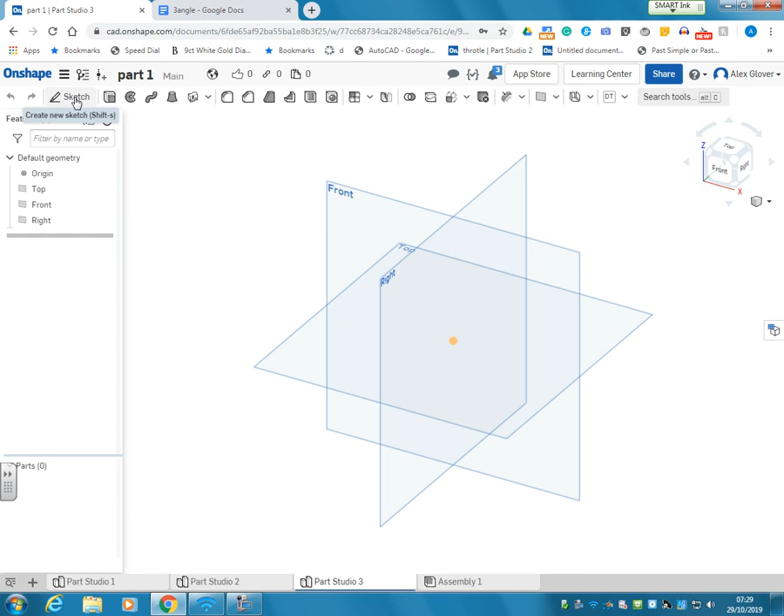Okay, so welcome back to part number 3. So on this part we've got quite a number of features to draw, and there's no constant cross section through the whole thing, so we're going to have to just do different sections at a time. So first of all, I'm going to draw on the front plane, and I'm going to put my back plane on there.

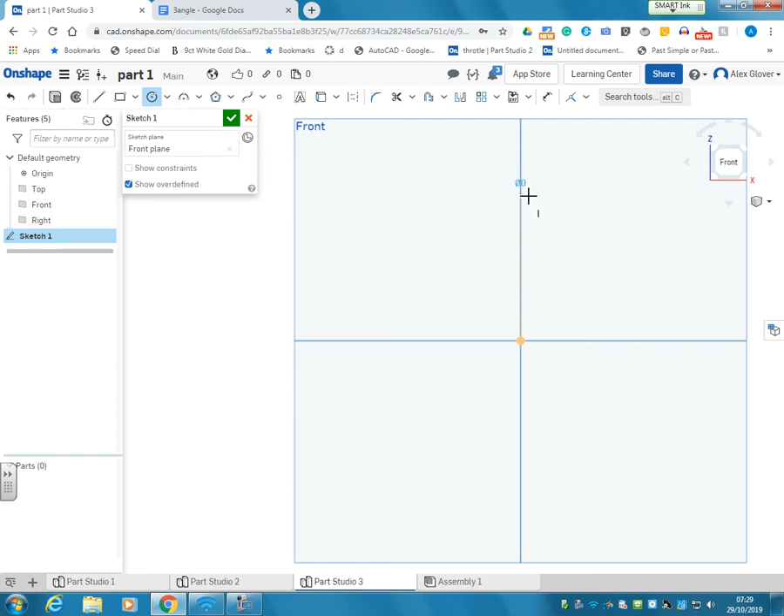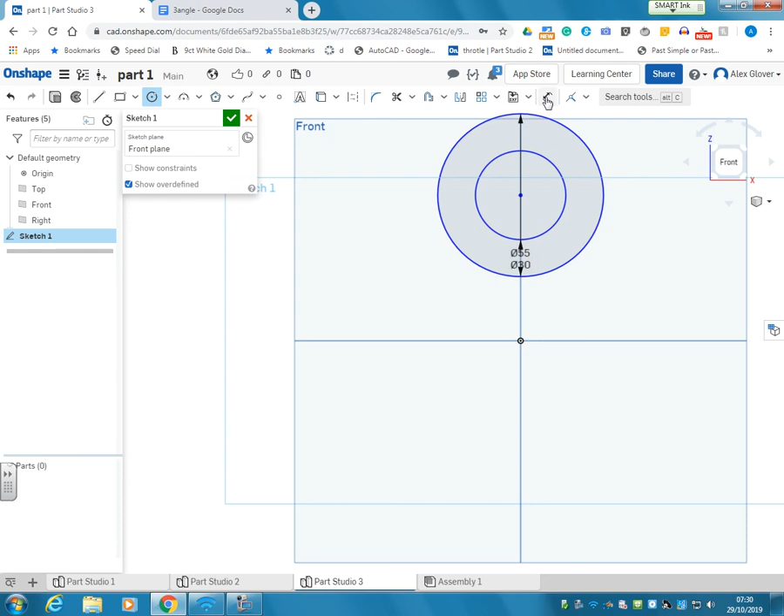So if we look at the drawing, we're going to use the circle. The biggest circle is the datum, and this circle is 55 diameter, and then there's another circle in 30, and we know dimension wise it is 100 mil from the bottom. We don't need much more detail than that because it's on this datum plane.

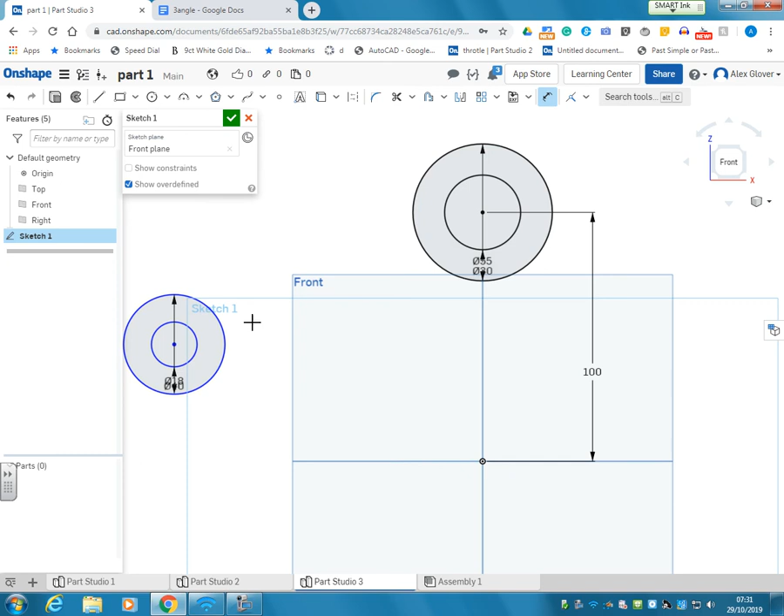So what do we need now? We need the other circle, which is out here somewhere. So the outer has a diameter of 40, and the inner circle has a diameter of 18. And we know that it, dimension wise, from the other circle here is 70,

and now we need to draw the line underneath. Straight down and then across to an unknown distance. We'll put that in a minute. Get rid of that line because we don't need it. These circles are still blue. This is because their height's unknown. We'll put that in now. It's 38.

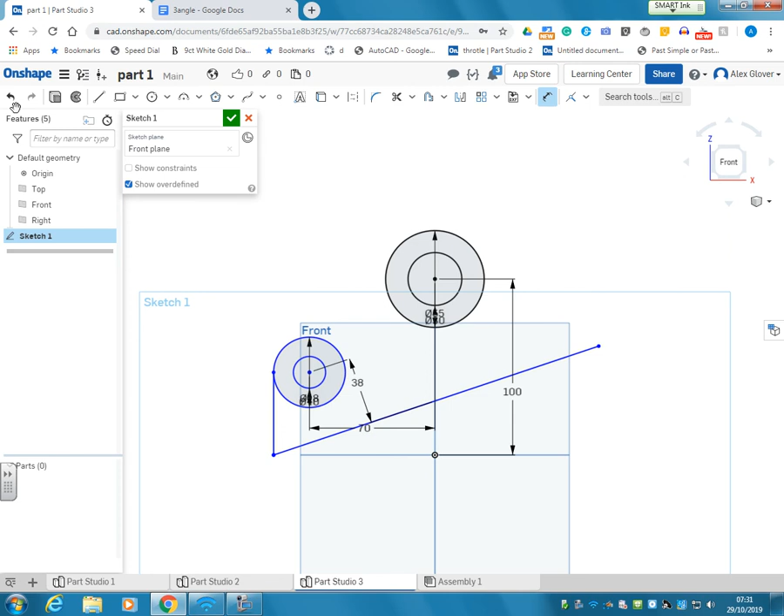Okay, it's took the line. So just go back a few steps. It'll make life easier to get that dimension in. So from there to that plane, 38, and now I can draw my line in. I think the line goes up to touch that.

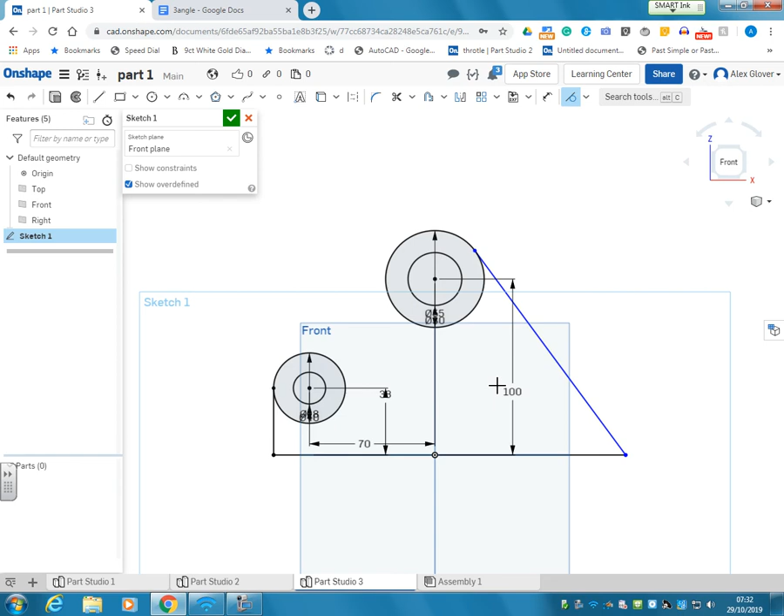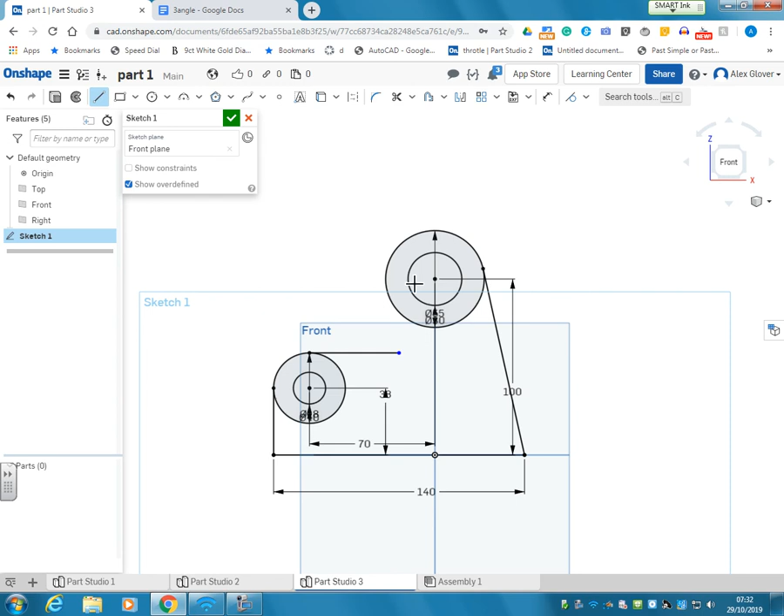Now it's at a tangent, so we can use tangent tool, click both of those, push the tangent, and we know the length of that line underneath is 140, and then we've also got, go from here across, and then from here down, then we'll put a radius in there. And I think it says the radius is 25.

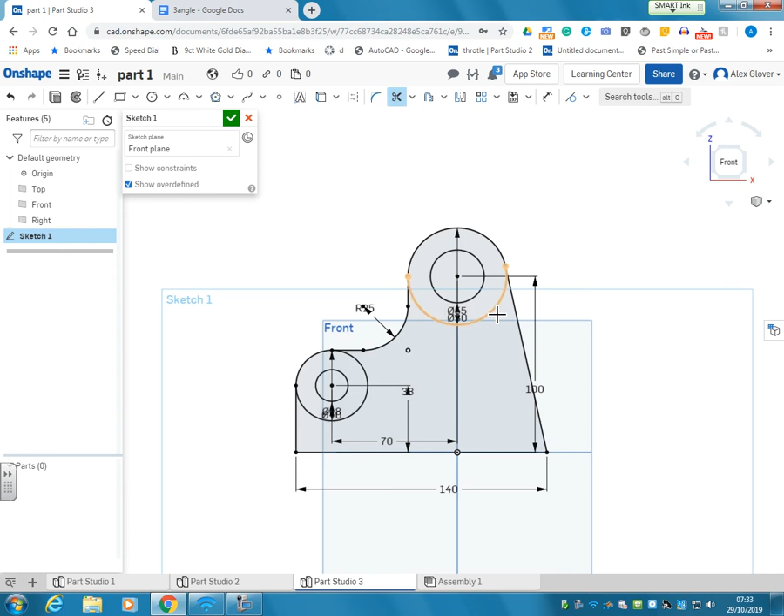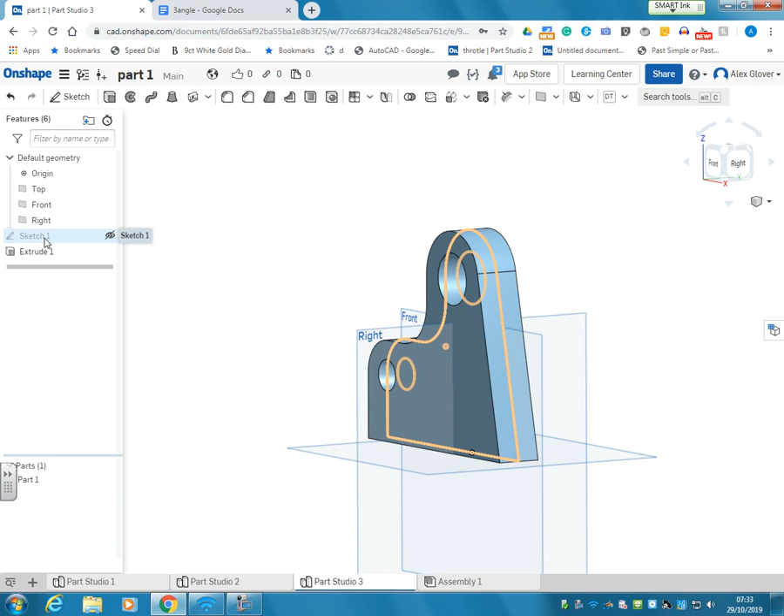Okay, and then we need to trim away what we don't need, which are these bits. And from that we can make the plate at the back. Now we're not going to make it blind, we're going to make it symmetrical, because there are some features on there, especially this circle at the top bit, which is symmetrical, and this bit isn't, but it doesn't really matter too much. We can pull it out from this surface. So that's okay, apart from the thickness, which was 12, not 25.

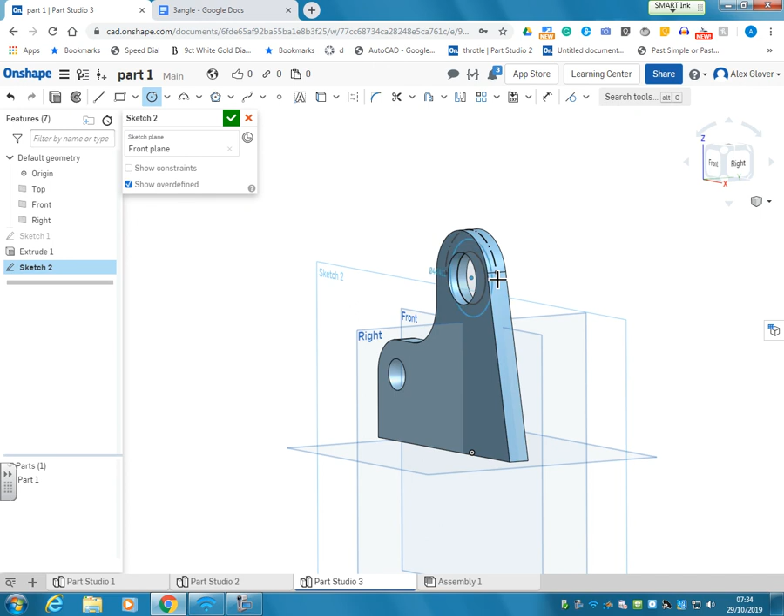So now, sketching on the front plane again, we can use and then get a circle and go out to there. So we've maintained design intent there, because whenever anything from the first sketch changes, these are all linked to it. We can extrude part 2 symmetrically, and the width of that is 36.

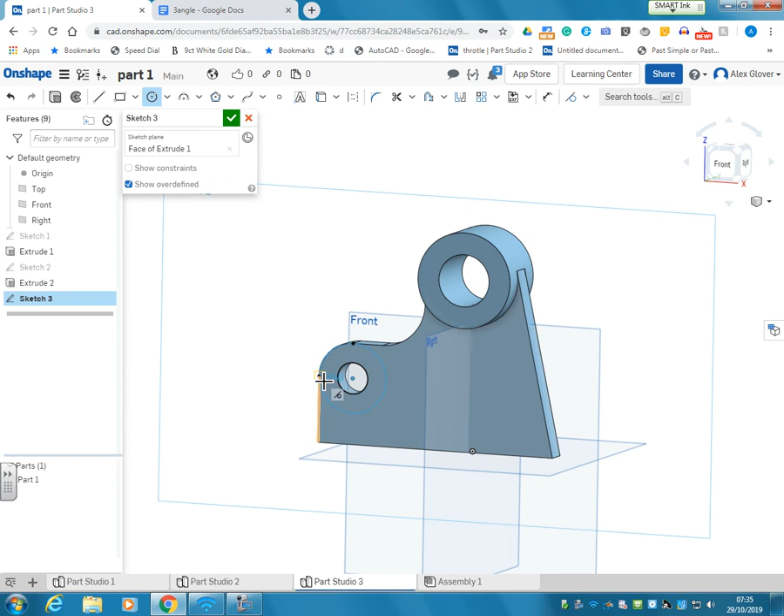And then we've got another sketch off the front of the face here, and we can use the inside of that circle, which will maintain design intent. Then we're going to pick up a construction one there. Now we could just type in the dimensions for this next circle, but it won't keep that design intent going. So if we do this, whenever we change the previous drawing, this will change with it. Okay, and then extrude, and that comes out 30 mil, but it's already 12, so 18 in total. Puts us there, and that's that bit done.

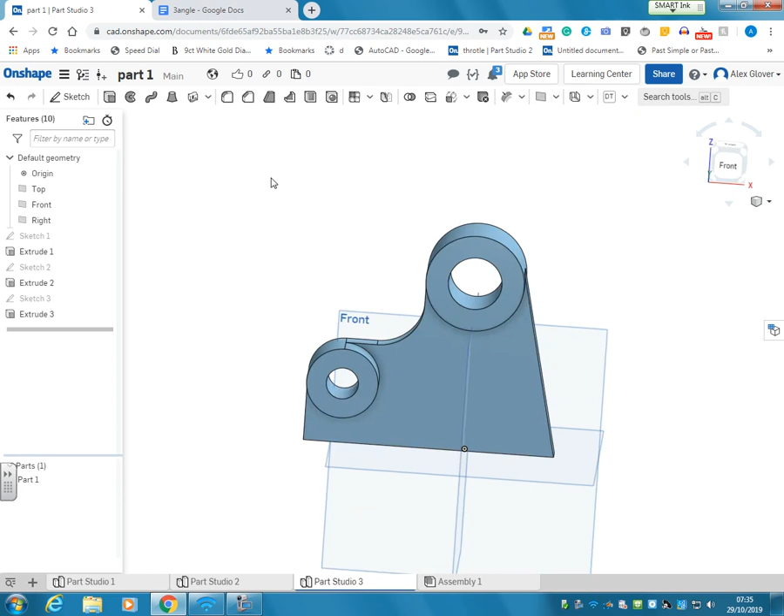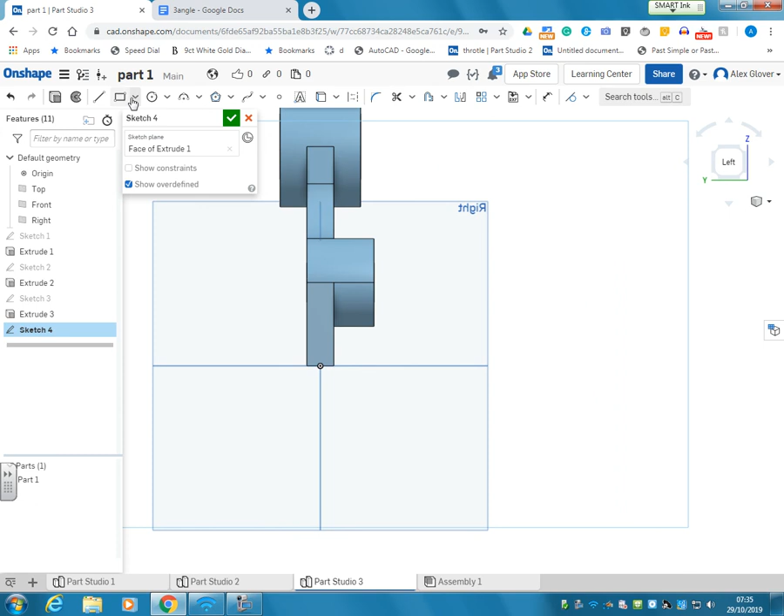Next bit is to do this section underneath. We could work from the middle, but that would be tricky, but we could work off one of these edges. This edge is at 90 degrees, this edge clearly isn't, it's at an angle, so we'll use this side. We'll sketch using this face, come round to the left, and then draw our rectangle using that corner as a datum edge, coming across. We're looking at it from the other way than the drawing, but that's okay. And then from the centre we can use that yellow line up so it constrains it to the centre.

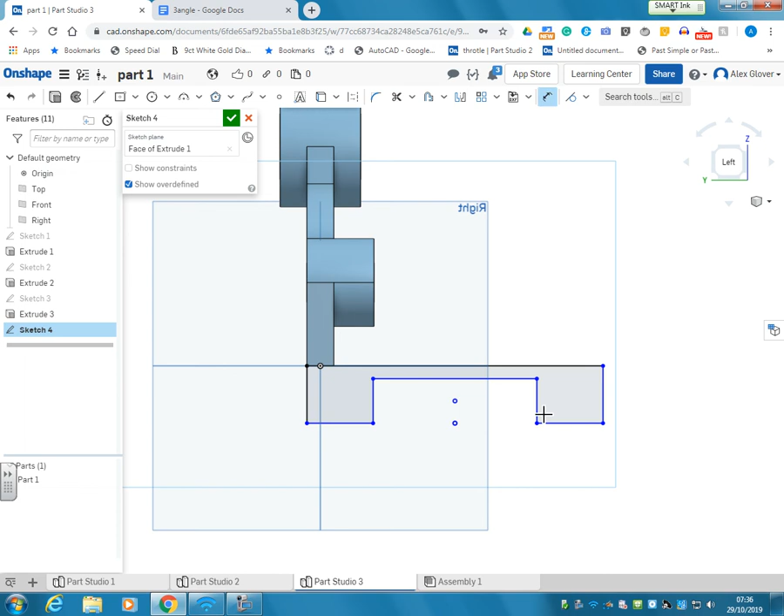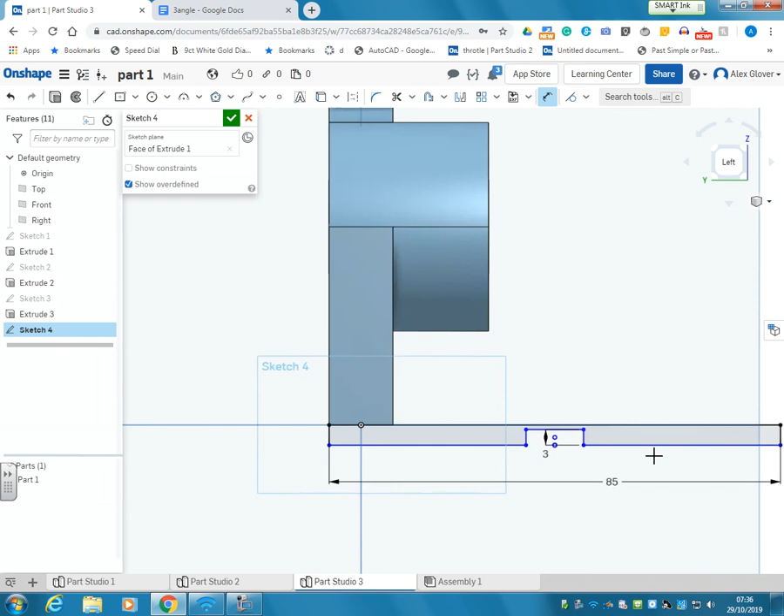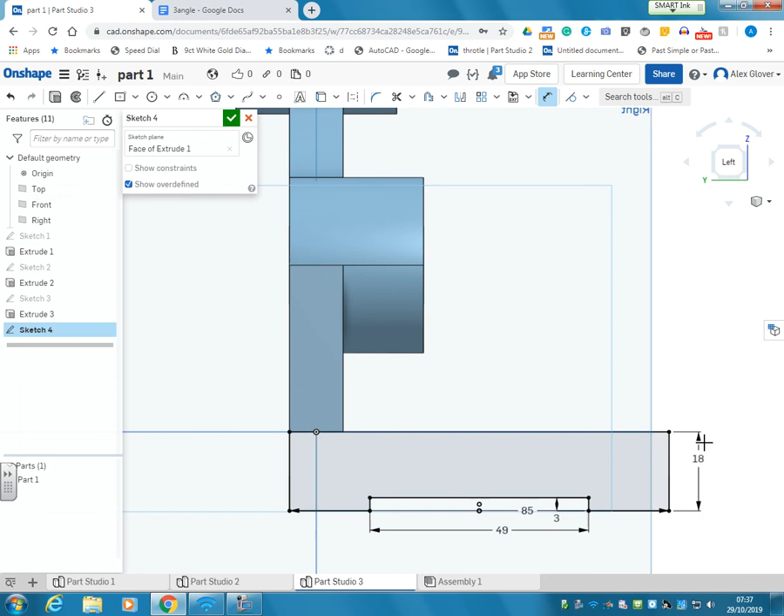And that's got a slot cut out. So that's 3 mil. Overall width of this is 73 plus 12, which is 85. Width of this section between here and here is 49. It's already centered, and then the height is 18. All black there, so it means it's fully constrained.

We can now extrude it back this way, and we know it's 140 mil. That takes us right to the edge. Excellent. Next bit is these 15 mil holes, so 12 mil holes. So sketch on the top plate here, 2 circles roughly where we think they are. And because we want them to be the same, we can press equals. That'll keep them both the same dimension.

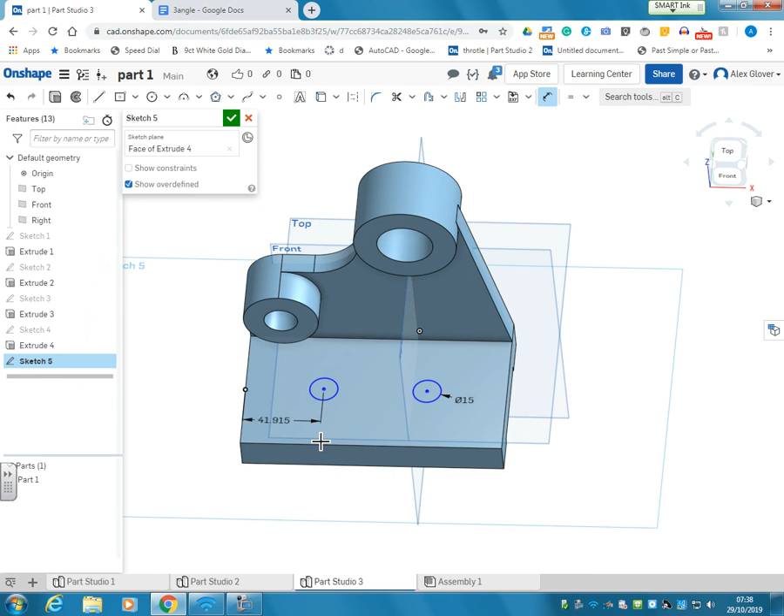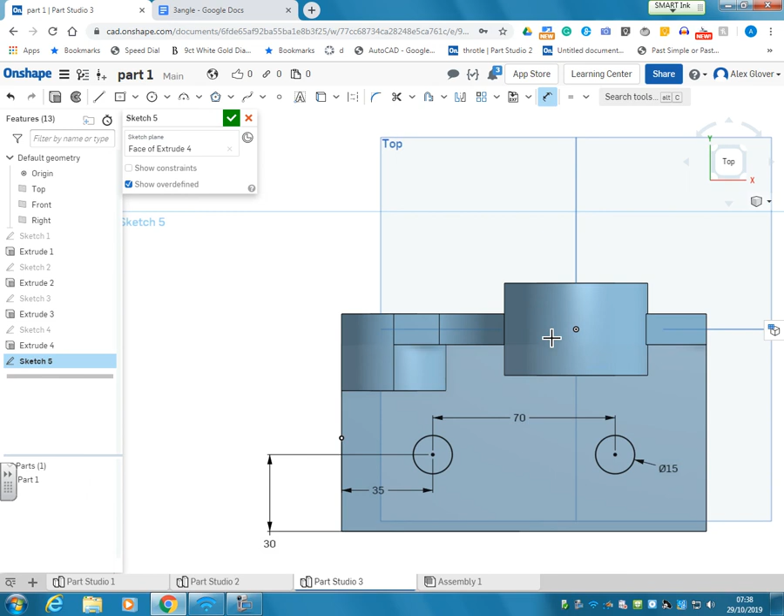We define the dimension being 15, and then put the other dimensions, for example from this edge. We're looking at 35, this edge 30. This one's still blue because it's not constrained its distance from here. Distance between the two is 70. That's okay.

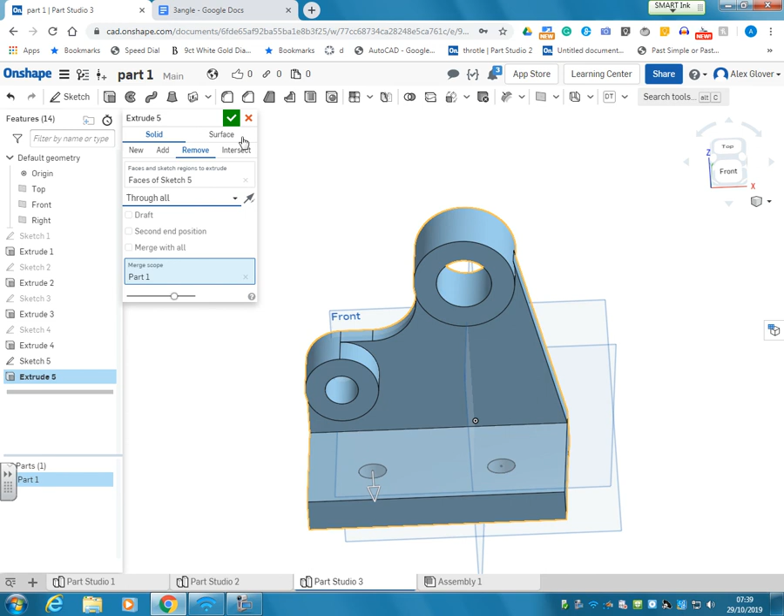Extrude both, remove through all. Wait for it to catch up. Yep. Excellent. That is part 3 complete.